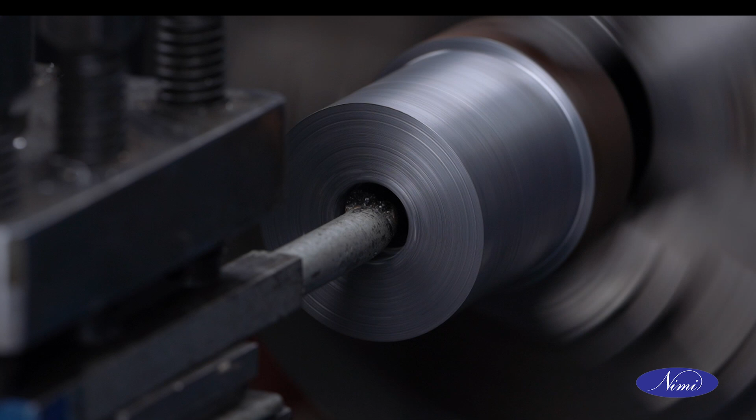Welcome to the session on boring practice: plane, counter and step, internal recessing. Let us begin with the session. Let us now look at the objectives of this session.

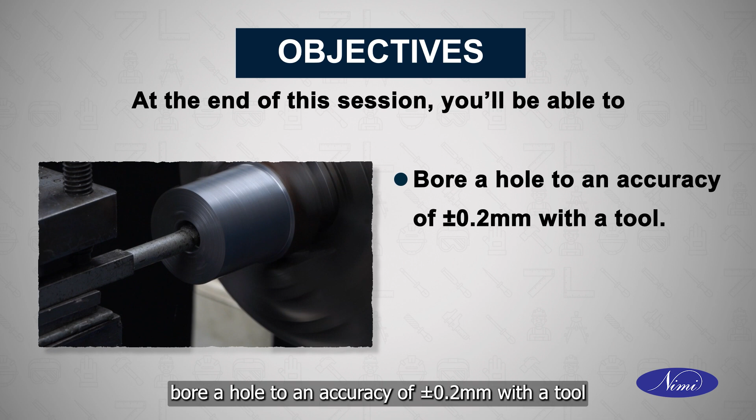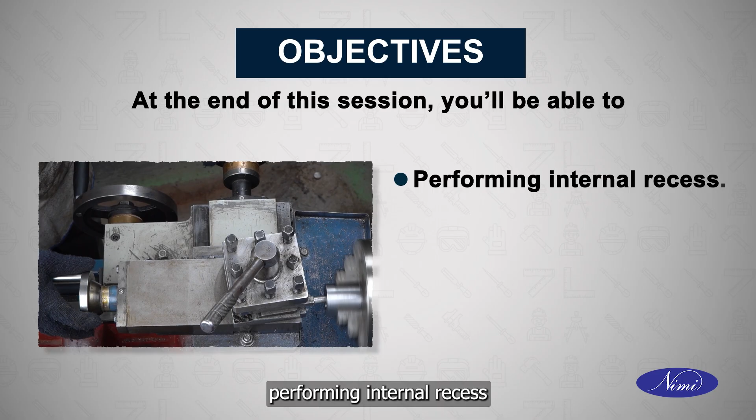At the end of this session, you will be able to drill a through hole, bore a hole to an accuracy of plus or minus 0.2 mm with a tool, perform step boring, perform internal recessing, and measure the bore and recessing with the help of vernier caliper and inside caliper.

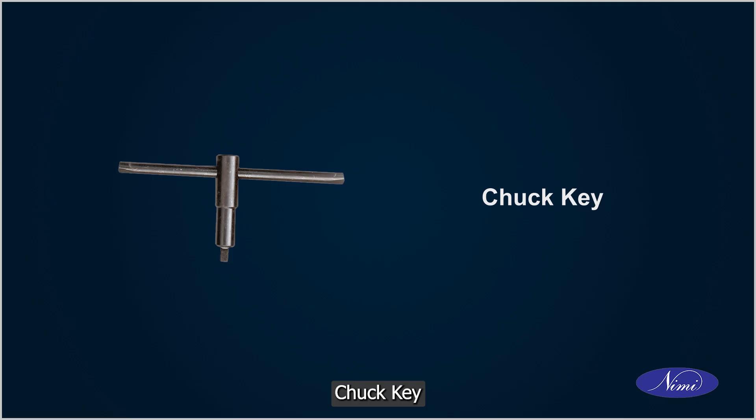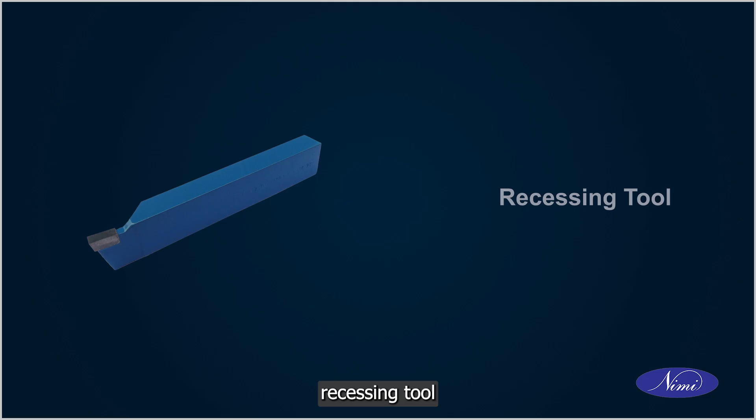The tools required to perform this exercise are outside caliper, inside caliper, steel rule, chuck key, facing tool, drill bits of various sizes, vernier caliper, radius gauge, recessing tool, boring bar, R2 and R3 tool.

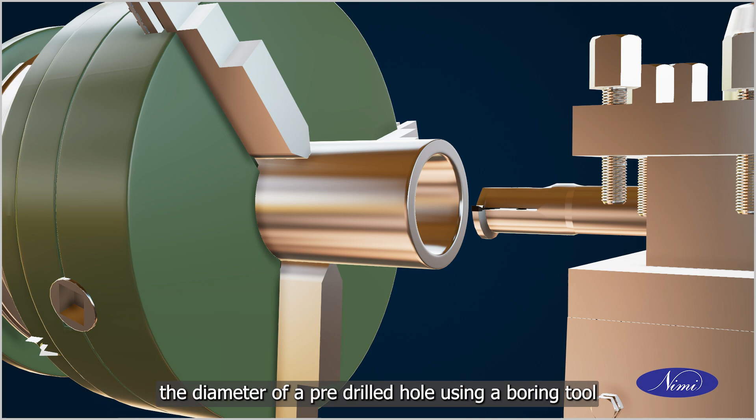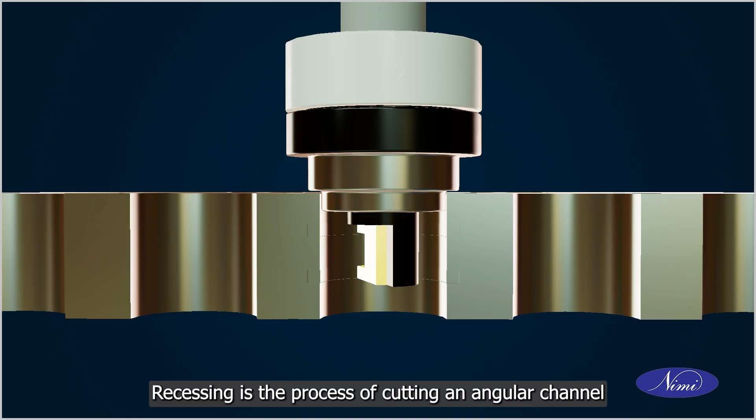Boring is the process of enlarging the diameter of a pre-drilled hole using a boring tool. Recessing is the process of cutting an angular channel inside the bored hole.

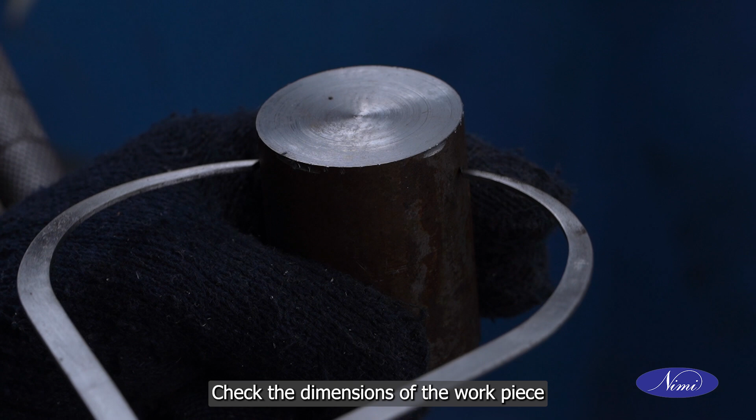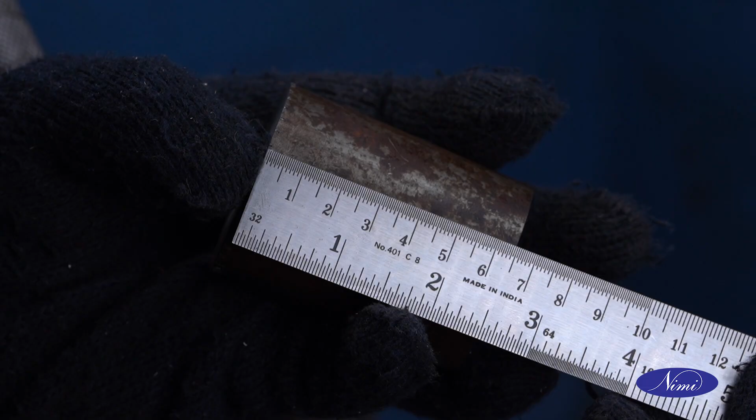Let us now learn the sequence to drill a hole and bore it to the required size. Check the dimensions of the workpiece using outside calipers and steel rule. Mount the job on a 3-jaw chuck using a chuck key such that 45 mm is outside the chuck.

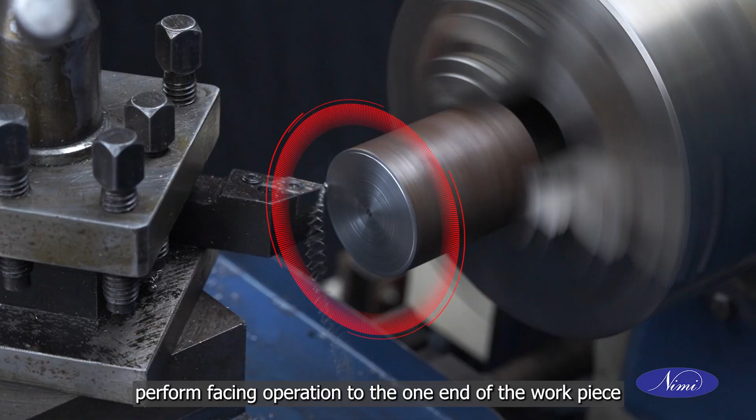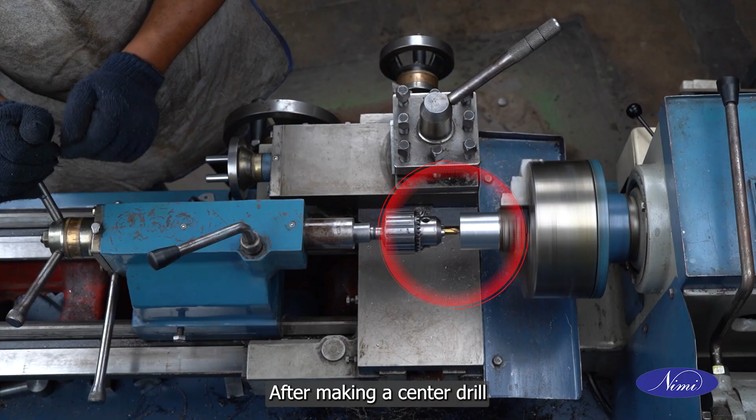Perform facing operation to one end of the workpiece. Perform turning operation for the maximum possible length to reduce the diameter to 45 mm. After making a center drill, hold a pilot drill of 10 mm along with the chuck in the tailstock. Move the tailstock to a convenient position for drilling and lock the tailstock on the bed.

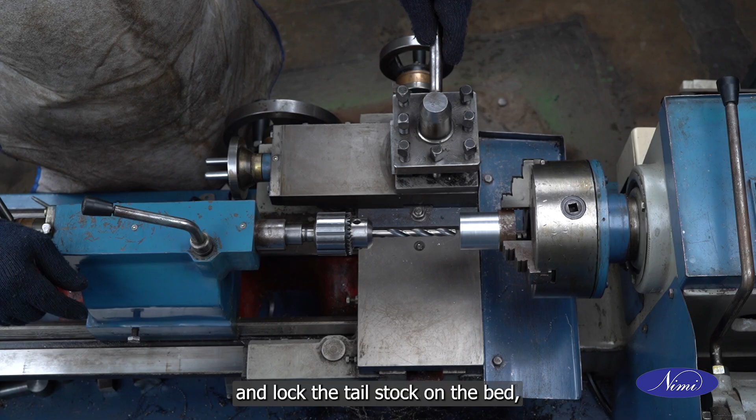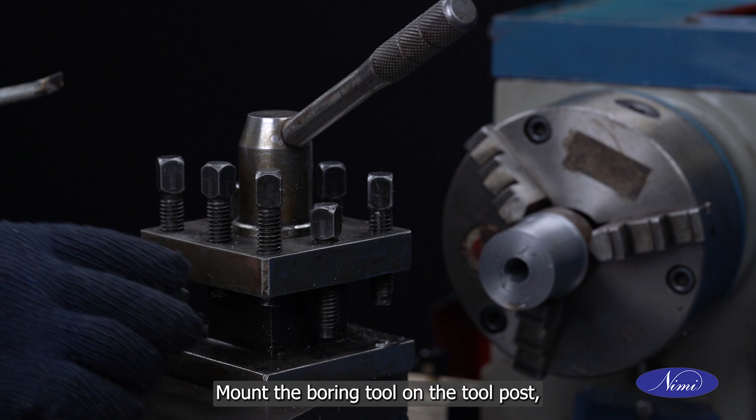Run the lathe and advance the drill so that it does the drilling operation on the job held in the chuck to obtain a through hole. Use a coolant while drilling and advance the drill slowly. Enlarge the hole to 14 mm by drilling. Mount the boring tool on the tool post.

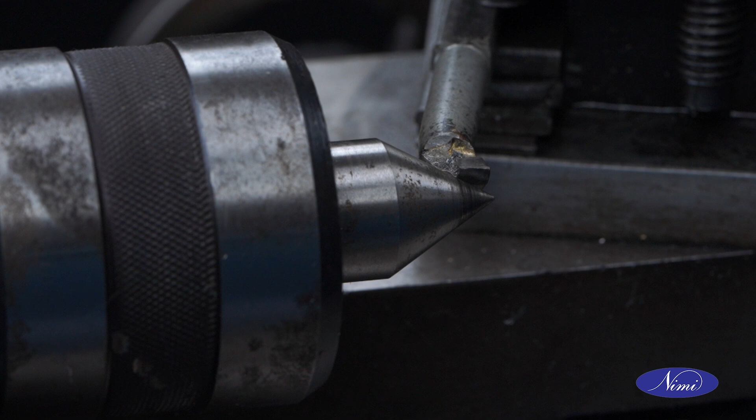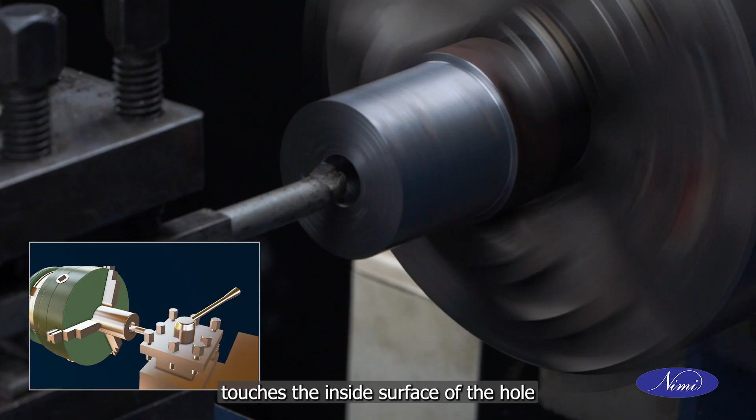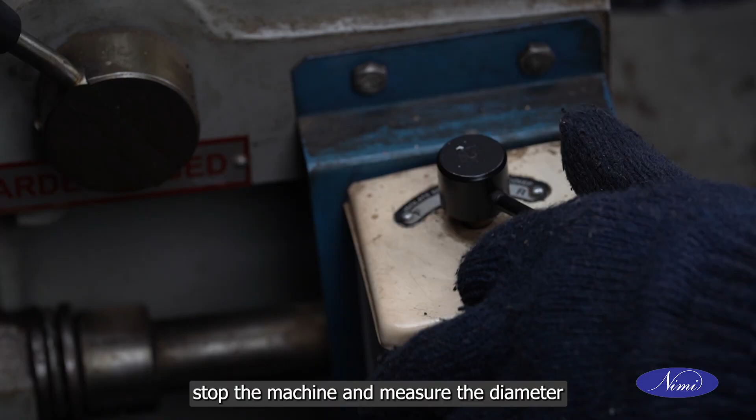Set the cutting edge of the cutting tool just slightly above the center line since there is a tendency for the tool to spring downwards when cutting. Start the machine and turn the cross slide handle anti-clockwise until the cutting tool touches the inside surface of the hole. Take a light trial cut about 0.2 mm deep and about 8 mm long at the right hand end of the work. Stop the machine and measure the diameter using a vernier caliper.

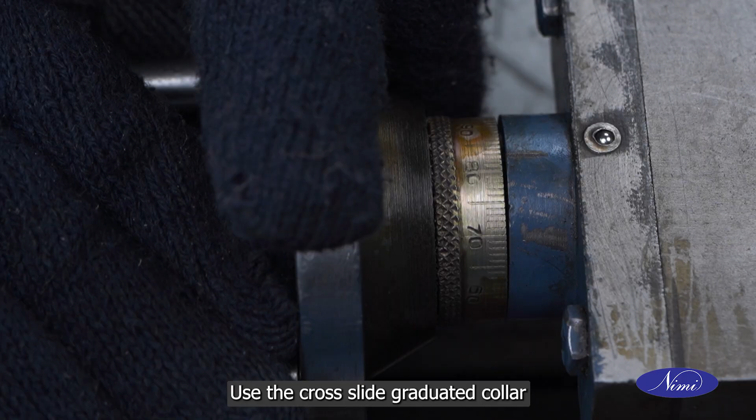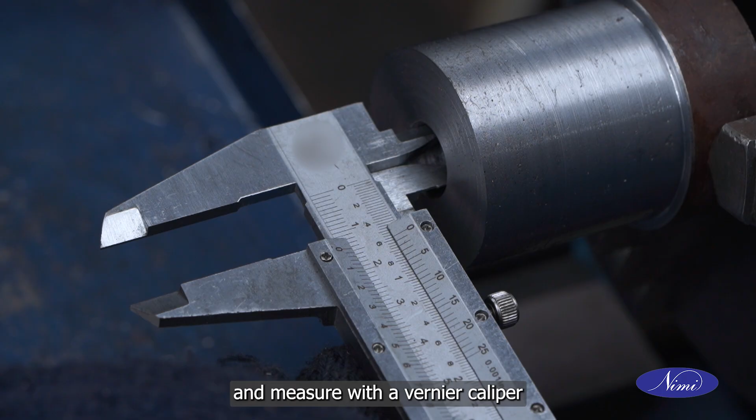Set the cutting tool for the required depth to get the finished bore size. Use the cross-slide graduated collar. Finish the boring operation to the required diameter of 15 mm and measure with a vernier caliper. Reverse and refix the job.

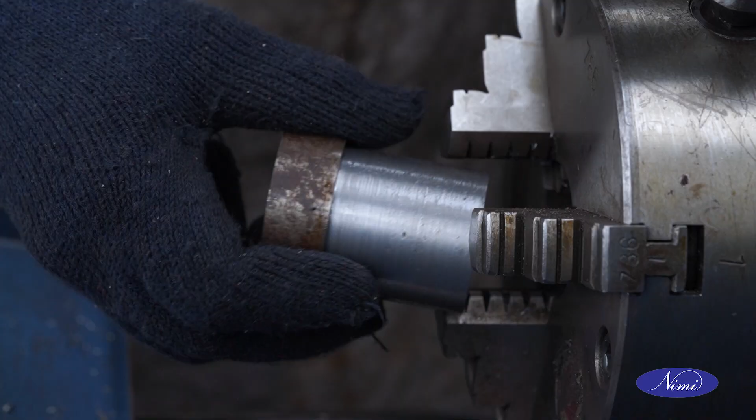Perform facing operation on the other end to obtain a total length of 45 mm. Perform turning operation to obtain 45 mm diameter throughout the length. Let us now learn the sequence to perform step boring and internal recessing. Mount the boring tool on the tool post. Use the largest diameter boring tool which can be accommodated in the drilled hole.

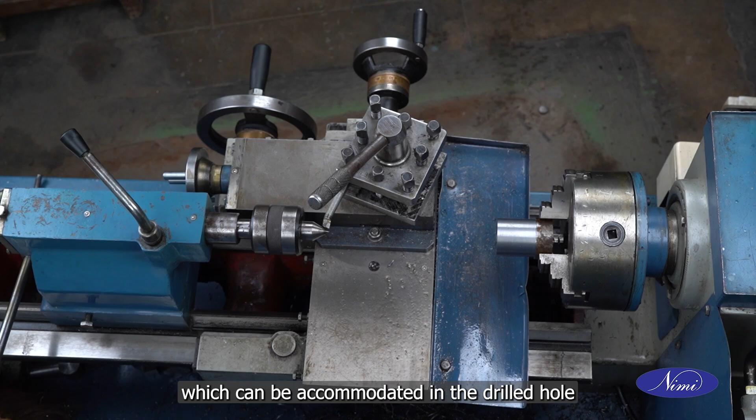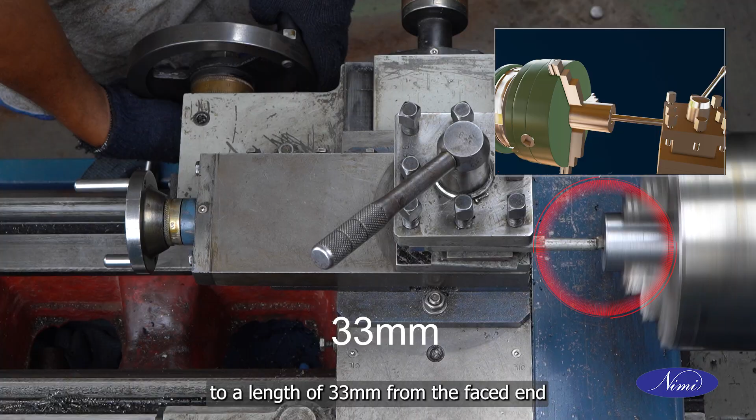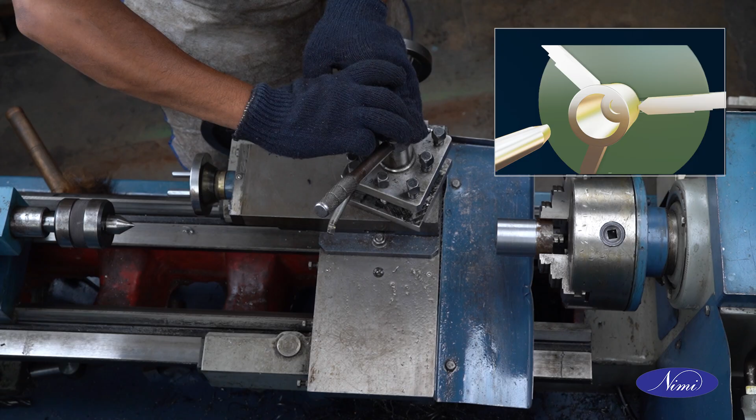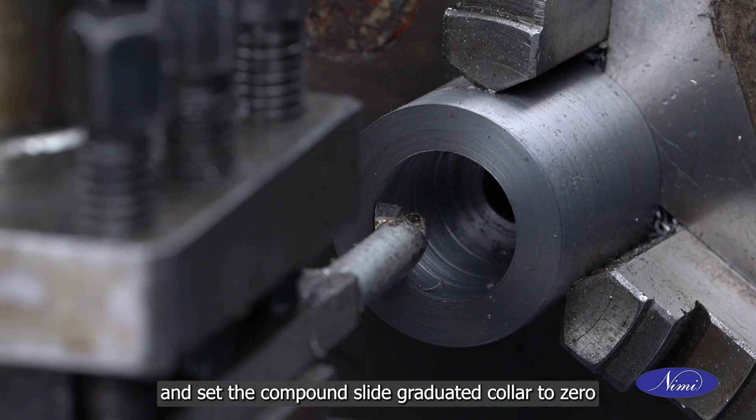Touch the edge of the tool to the face of the workpiece using the top slide handle and set the compound slide graduated collar to 0. Turn the cross slide handle so that the front of the tool just clears the wall of the bore. Turn the top slide handle to position the tool at the calculated distance into the bore.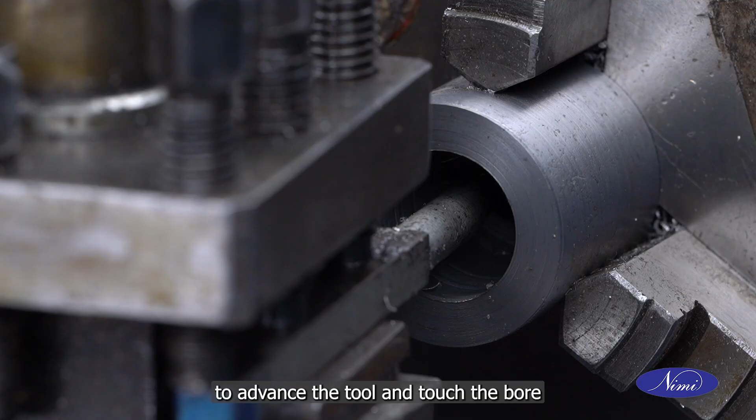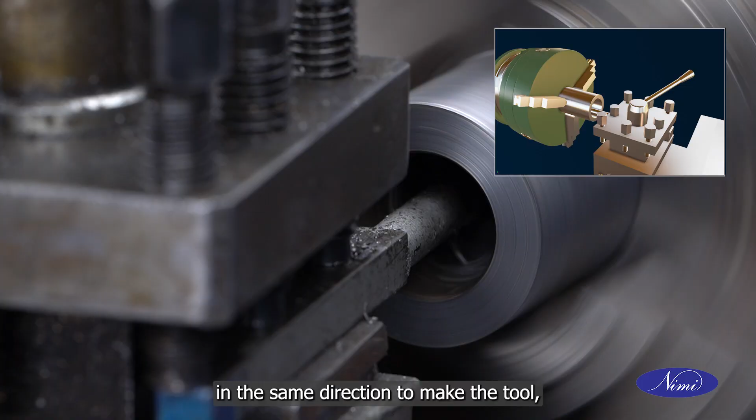Turn the cross slide handle wheel in an anti-clockwise direction to advance the tool and touch the bore, and note the cross feed graduated collar reading. Rotate the cross slide handle wheel in the same direction to make the tool remove the metal from the bore to form a 4 mm wide, 35 mm diameter and 2 mm radius recess. Retract the tool by moving the saddle towards the tailstock.

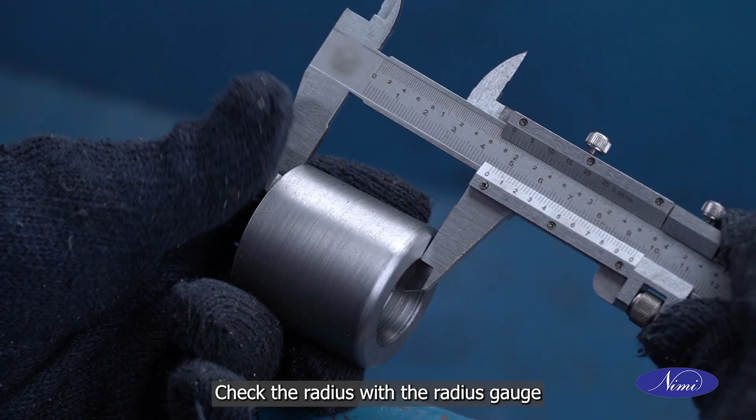With an R3 radius tool, turn one edge of the workpiece as per sketch. Deburr all the sharp edges. Check the radius with the radius gauge and other dimensions using calipers.

Safety precautions. Select and set proper spindle speed as per size and operation. Set the tools to the correct center height. Use a pilot drill while drilling more than 20 mm drill size. Feed the drill slowly while drilling. Use a coolant while drilling. Grip the boring tools as short as possible to reduce chatter.

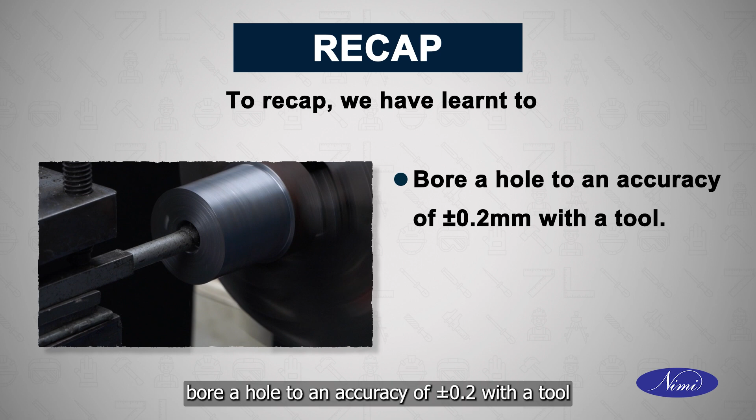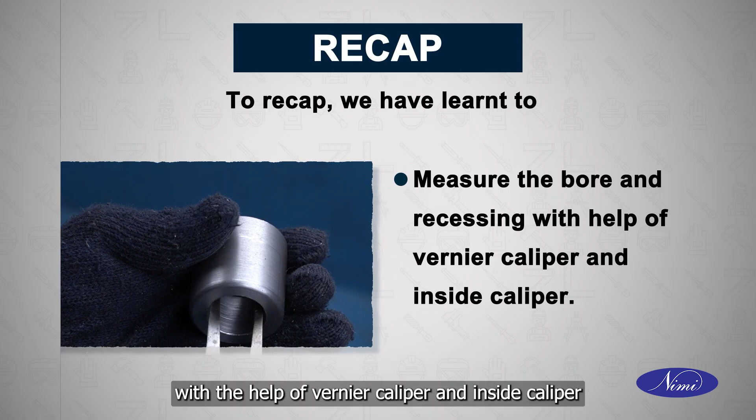To recap, we have learned to drill a through hole, bore a hole to an accuracy of plus or minus 0.2 mm with a tool, perform step boring, perform internal recessing, and measure the bore and recessing with the help of vernier caliper and inside caliper. So that's all about boring practice: plain, counter and step, internal recessing.